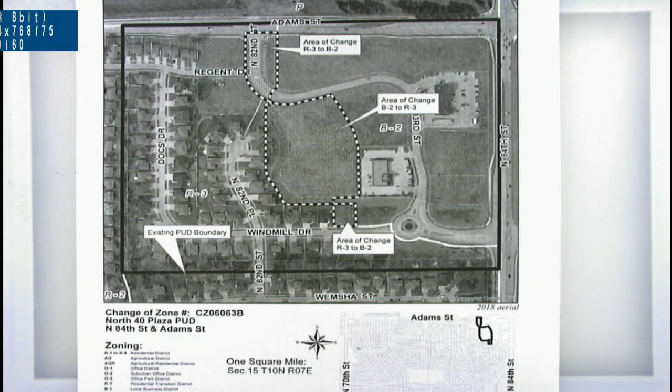Rachel Jones, planning staff. This is a proposed amendment to the North 40 Plaza PUD, which is located at North 84th Street and Adams Street. So here we have Adams Street on the north and 84th Street on the east. This is a proposal to convert several office and commercial lots to residential, and they are showing a total of 28 new single-family attached units.

So the three areas of change: we have this area and this area west of North 82nd Street, which are designated for office uses, currently going to single-family attached residential, and also this area south of Regent Drive, currently zoned B2 PUD, that would also be changed to single-family attached and be located on a new cul-de-sac.

So we have received correspondence from some of the neighbors, in particular the owner at 8224 Windmill Drive, regarding the pedestrian easement location. And this is a long block, so a connection was required from the new proposed cul-de-sac.

And it was originally shown connecting Regent Place with Windmill Drive to the south, as shown here in blue. And so based on the owner's opposition, who lives here, and several other neighbors, the pedestrian easement will be relocated to run east, connecting to North 83rd Street, south of the Jensen Tire. So that change is shown here in orange, so it would come down and then east like this.

And the planning department's position is that this is a reasonable compromise, and this would move it further from her property while still preserving a connection.

This is another exhibit created by the applicant that shows the revised easement location, and it's showing just over 30 feet from her property line to the new sidewalk.

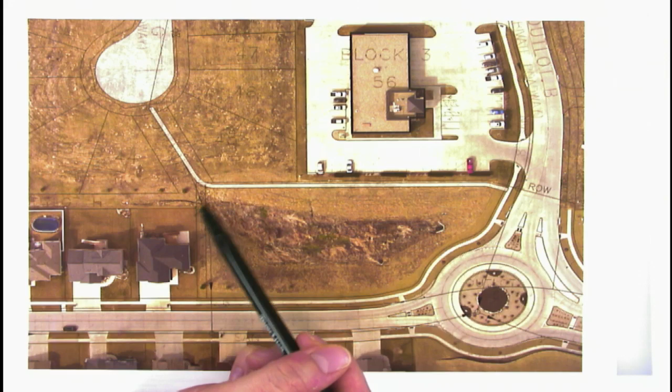There was some discussion about moving it further north on the north side of Jensen Tire, but that would cause the connection to serve less of a purpose for the new cul-de-sac residents. We anticipate there will be some desire to head south and west from the cul-de-sac because there's a school located to the southwest.

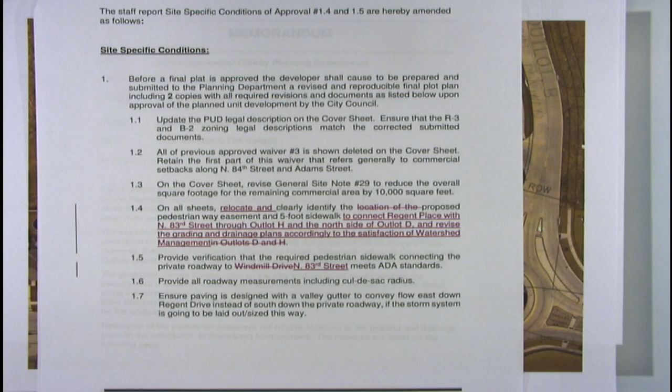So we submitted a memo to the Planning Commission revising the conditions for the change, which I think you all have received. The Watershed Management Division and the applicant both believe that the revised location is feasible based on the grading. So with that, I'll take any questions you have.

Are these amendments that we would need to approve, or have they just been changed with the staff report? They are just being changed in the staff report, is how they were submitted. So they would now be part of the project? That's correct. Thank you. Any other questions for staff? No? Okay, thanks, Rachel.

Thank you. Testimony from the applicant, please.

Good afternoon, Commissioners. My name is Luke Summers. I'm here on behalf of Clark Anderson Partners. We are working with the applicant, Apple's Way.

I've brought an exhibit showing the area where we're proposing these changes. You can see it was originally designed to be commercial, but we've gotten some interest in residential development there that they'd like to take place this spring and summer if we can get everything approved. Originally it was going to be commercial, and it's been set that way and vacant for 10 or 15 years, I believe. So with this interest, we're looking to request a change of zone to change that commercial area to residential.

With that, the city planning department has asked us to clean up the zoning boundary that was originally set with the original PUD, just to show what the defined uses really are going to be. There are a couple areas on the north and south that were originally residential that are going to be reverting to commercial, and some that were residential. One area was part of this commercial lot and a bit of the commercial private drive, and another was part of a detention pond that was originally set to be a lot, but the detention moved around and became part of the pond. So there's no longer going to be a single-family home there.

So we're proposing attached single-family dwellings here to act as a buffer between the existing residential and the commercial area. We had originally proposed the pedestrian crossing here, expecting traffic would want to go south and west, but we are willing to change that and move it to the east if that will make things more agreeable for the neighbors.

So we are agreeable to that change, and like I said, we've got somebody who thinks they're ready to develop it, so we would like to reach some sort of agreement this afternoon on what course we should be taking. Any questions?

Okay, thank you. Any questions for Mr. Summers? No? Okay, thank you. Now we'd be calling testimony in support of this application. Seeing none, let's look at testimony in opposition of this application. Okay, excuse me, thank you.

I've never done this, so take your time. It's okay. I think I agree with the zoning change. We live at 8224. Brittany Banders. Did you get the address, Jerry? Yes. Okay, excellent.

We agree with the zoning changes. What we're in opposition to is where the sidewalk is going to be placed, or where they're proposing it. I know they helped us out by not having it go along the east side of our house, which was huge for us, but I think the problem we still have is it's still within our backyard area. We have young children, and we don't want the traffic or feel like there's people walking within our back area where we spend a lot of time. Where they're proposing it, we still feel is very close to our backyard.

We were also told there was a possibility they could put it between the two businesses, which we think makes a lot more sense. It doesn't hinder any residents' privacy. Our end lot, we thought we picked it because it had more privacy, and now we feel like that's being taken away. So we feel that putting it between the two businesses isn't that much of a difference lengthwise. They're saying it doesn't serve a purpose there, but really it's on the other side of the building.

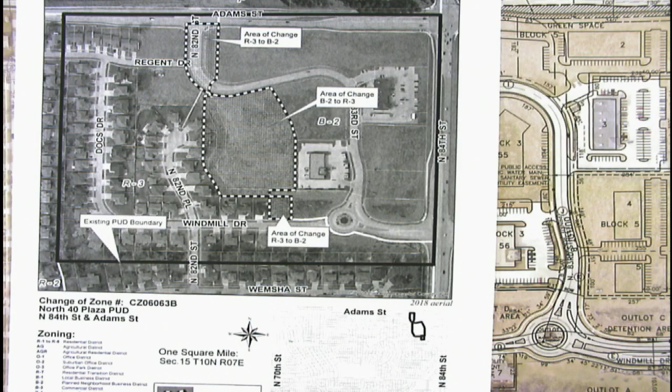I'm good. Okay, Rachel, would you show us on the map where, between the two businesses, the neighbors are proposing? So they're proposing a third alternative that would be located right here. Okay, thank you. And then show that on the other plan, the one where it's developed with the lots, showing it, if you don't mind. Thank you, that'd be great.

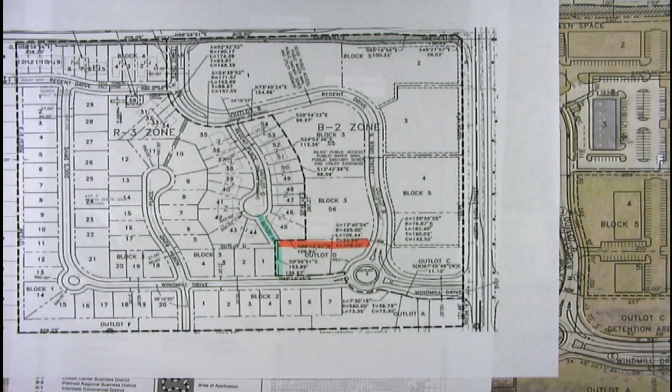So it would be somewhere right around there? Yes. Would it eliminate a lot if that were to be done? A residential lot? It could. That would be something the applicant would have to look at and see.

Okay, any other questions for staff? Okay. Applicant rebuttal, please.

We have taken a look at that, the possibility of putting it between those two businesses. We don't own either of those properties anymore, they're both owned by other entities. There's no existing easement for pedestrian access across there. At one time, before the north one was platted, there was an access easement with the expectation this was going to be commercial and you'd have a driveway or something through there, but that has been vacated and is no longer part of that parcel.

So it would take some property easement acquisition to make that happen, and it also doesn't flow well with our current layout. With the townhomes here, we'd have to bring it somewhere south here, have a jog to the north, and then bring it across somewhere, and it just does not flow well. We'd have to look at whether we can rearrange lots somehow to make it work, and they are very tight as it is. That's why we've requested a couple waivers for dimensions and stuff for it. So it would be very challenging to make that option work.

There will be, if we do this route, some additional grading, maybe a short retaining wall or something to make sure that we can make that work. But it would also be on the opposite side of an existing drainage way. There's a drainage way here in this outlot H that connects this area to the west with this detention area. So it's a fairly significant drainage way across there. That would also help separate this property from that sidewalk.

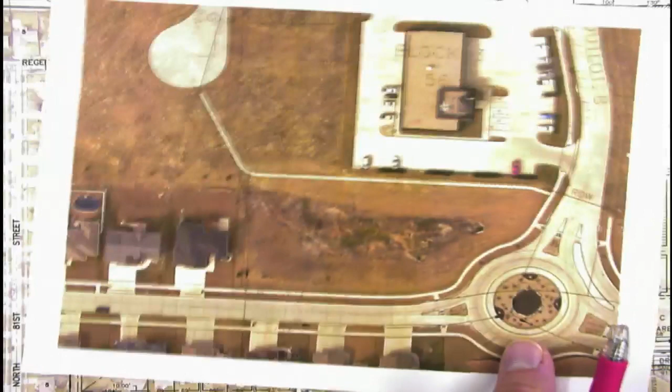And how far would the path go between that property and the property to the south? The closest point here was 30 feet, and I've got another exhibit here. So this property corner right here would be approximately 30 feet from the trail at its closest point.

And can you point out on that map the drainage way you were talking about? Yes, it's right here. There's a drainage way right through here that flows into this pond. Thank you.

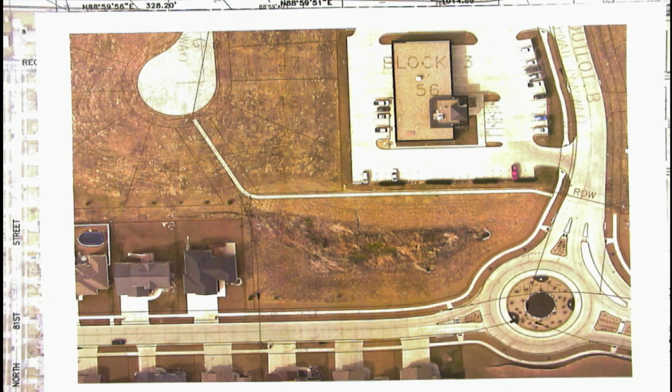Would you be willing to do some landscaping on that corner to separate it for the homeowner? We could certainly talk to the developer about that. With the drainage, I mean, there's already some landscaping, but I could talk with the developer about that.

Any other questions? I have a question. How about, would you be able to entertain putting it between 45 and 46 and then take it down to the sidewalk?

Between 45 and 46, those are meant to be a shared lot line. It'd have to go between 46 and 47. We have not looked at that option. That would lengthen it even more.

One of the reasons we specifically looked at this is because there's already storm sewer and sanitary that are going to be through this outlot, which is not a buildable area. We're going to have a wider area to get that path through. All of these are approximately 10 feet at the narrowest spot, and they're almost right on the setback line. So if we're going to put in a pedestrian way or an easement between any of those buildings, we're going to have to start moving buildings around to make it fit. Whereas here, we've got an outlot that we would be putting it in.

Other questions? Just so to clarify, if that's an outlot, it's not going to be built on. There's a chance that even if you moved the official sidewalk up, people are still going to naturally walk through there because it's not built.

We're hoping to fit probably some daylight lots on there so that it's not the full basement, but I don't think we have quite the grade to make them walkouts. So it is going to be elevated a little bit as well, and that's going to be the overflow channel from the cul-de-sac down, so it's going to be graded a little more gently through there as well.

Okay. Any other questions? Okay, thank you.

I would move we close the public hearing. Second. We've made a motion to close it. Edgerton, sorry. Edgerton? Okay, yep, thank you.

Sorry about that. Okay. We have made a motion to close the public hearing with a second. Let's have a vote on that, please, Jerry.

Albadre? Yes. Campbell? Yes. Edgerton? Yes. Finnegan? Yes. Joy? Yes. Raymond Yost? Yes. Motion carried, 6-0.

I would make a motion to approve this plan, and would request that the developer do some landscaping on the corner to give the homeowners a little separation from the path.

I'll second. Edgerton. Okay, we've had a motion with a second to accept the revisions that we've heard today and then add landscaping. Is that correct? Mm-hmm. Yep.

Okay, hold on. I have a feeling that the landscaping may be a challenge for us to implement, given that the developer is different than the owner. Right, that's why I'm requesting that the developer do it, not as part of the motion, but as a suggestion. Right. Okay, perfect. And with the detention area—

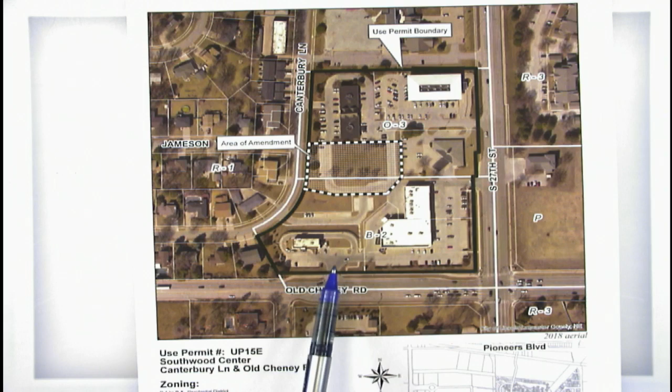Lot 4 is about 1.1 acres. It's mostly in the O3 zoning district. It is the last vacant lot within this use permit. The proposal is basically shifting some square footage from Lot 7, where there is currently a Dunkin' Donuts, to Lot 4. So again, the overall square footage remains the same.

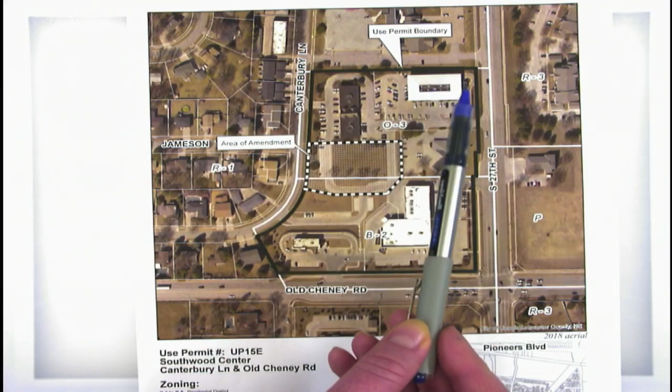Access can be taken into the site off of South 27th Street in a couple places, Old Cheney Road, and also North Jameson and Canterbury Lane. Within the total use permit, there are approximately 350 parking stalls, which exceeds the 297 parking stalls that are required.

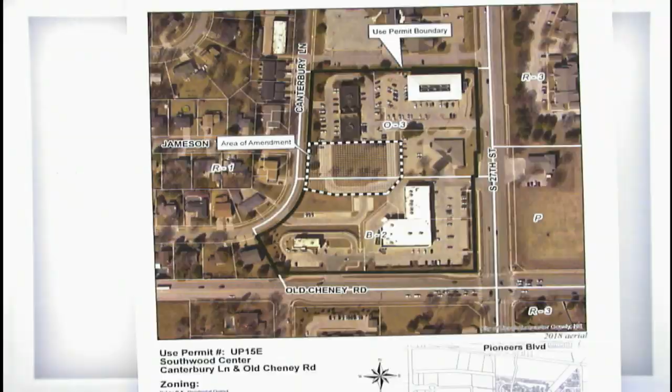Originally, LTU did have some concerns about the number of peak trips being generated by this proposal, and also with some of the stacking with the drop-offs. However, the applicant provided updated numbers on trips and times based on another existing facility the franchise has already built, and they showed compliance with the stacking requirements per our code. After additional discussions, LTU agreed to delete the 2 conditions outlined in your staff memo. Also, there was a typo in the legal description where it said lot 3 and it should say lot 4, but that has been corrected and will be corrected as we move forward with council. With that, I'm happy to take any questions.

Can you explain what a stacking area is and how that works? Sure. In certain uses, when there are cars that may have to drop children off, they have parking where... this is the building, and the cars line up and stack across the building. We have certain requirements for that. It'd be very similar to any bank drive-through or restaurant drive-through.

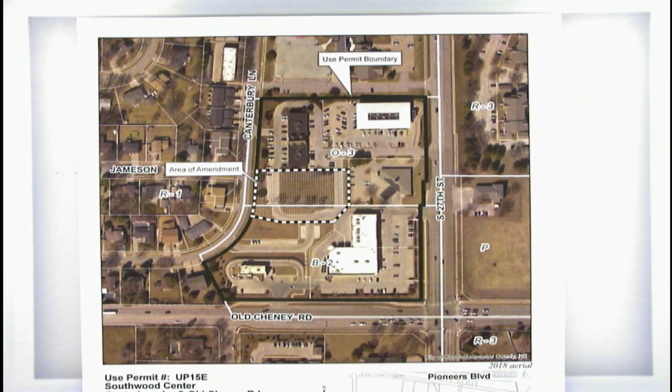That ground slopes to the west. Has there been any indication in your working with them how they're going to handle the drainage coming off the other pad sites? I think that would probably be a question for the applicant. I do know that there is an existing detention facility that was built basically to handle the full build-out of the development. Okay, thank you. Other questions for staff? Okay, thank you very much.

Let me zoom in here on this plan. This shows the layout of the building. The building would be located right here, and there's an L-shaped piece on the east and south sides of the building that would be the playground area.

There is quite a bit of grade associated with the property. It would be a 2-story building. The eastern portion, which would have the play area, would generally be on the higher side of the property, and the lower side would be the floor everybody enters. So most of the people dropping their children off would park on the west side of the building and enter the lower level.

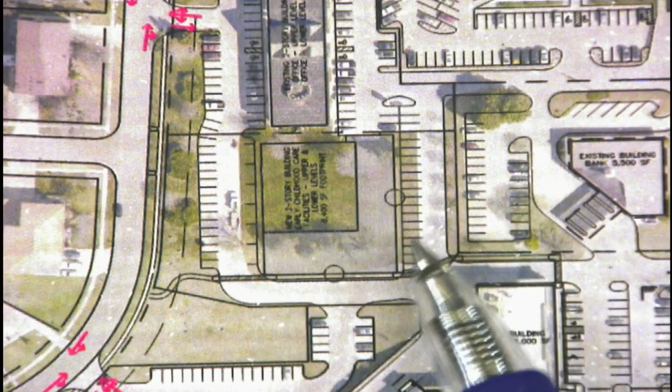I'm not sure if Desi knew this, but there would be parking added, with parking stalls added primarily along the play area on the east side. Then right in front of the building, as Desi had drawn, there's stalls.

Let me say that again. There's kind of a drop-off lane. We designated in this picture just to show how many vehicles you could stack there with different tick marks as it would be with parallel parking. Those markings won't actually be there, so it won't look like parking spots. This will be a drop-off area, and cars will filter through there.

We've presented this to LTU in a better fashion to show how this would operate. We do anticipate that there will be parents parking in the parking lot along the west side and getting into stalls to get their children out and into the building. The cross parking is really good because employees won't have to take up those stalls, and they will be able to park along the east or even the south side of the property where there are additional stalls rarely used by the development currently.

As for drainage, right now probably 90% of the drainage is actually installed already, so the additional parking will connect to it. There's a detention cell directly to the south that takes the additional runoff from the development, has been pre-planned and recently upgraded to meet current city standards and regraded. So the city has actually looked at that very recently.

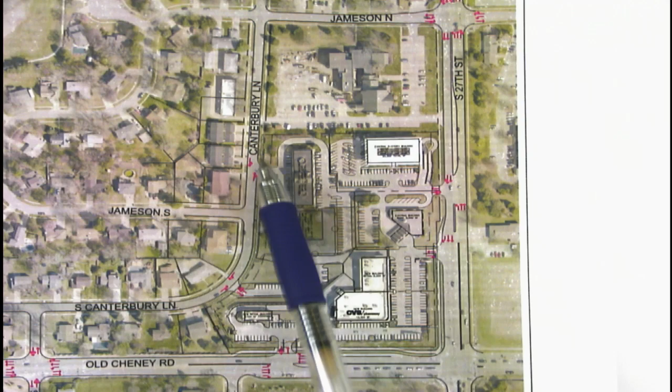I'll point out that there were some questions about accessibility of the site and the locations and traffic. The use permit boundary has 2 full access locations: one is right here, and another across from the Dunkin' Donuts. There is also a right-in, right-out located southeast of this property.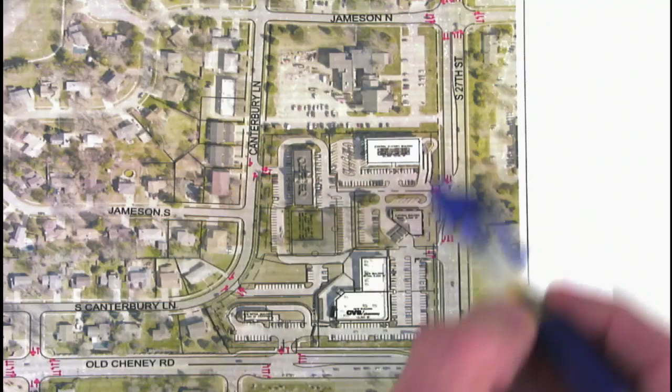There are 2 locations where people may be coming from the neighborhoods to drop their kids off to the site off of Canterbury, and if they don't make their way through the parking lots of the office park, they could go up to Jameson or even back down to Old Cheney and get to 2 other full access locations. Jameson is a signalized intersection, so that would probably be a really good location for people to go.

So with that, I'd be very happy to answer any questions about the application. Any questions for Brad? A comment.

I was in New York and I got into stacking chaos, at my granddaughter's place, so I panic when I hear stacking. They're not Nebraska nice in New York.

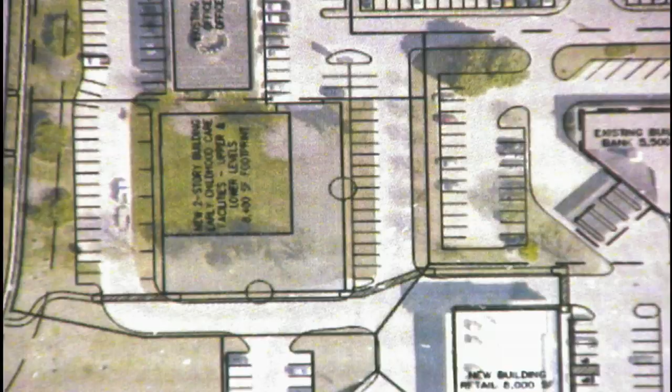How much stacking do you anticipate there? Let's see here. I didn't count the stalls, but I think there's enough room for 5 or 6 vehicles on the west side of the building. We would generally give 20 or 20 plus feet for each vehicle. This day and age, the vehicles are much bigger and they do need a little bit of room.

There was concern when we were talking with LTU. I start thinking about dropping kids off, which I do about every day at elementary school, and you get into that long stacking situation at LPS to drop them off. This is going to be much more spread out than that. It's not like a school with an 8 o'clock opening where you're dropping off hundreds of kids at one time. This will be spread out.

The analysis that they provided, between 6:30 and 9 o'clock for a very similar sized franchise, the maximum number of vehicles they had was between 7:45 and 8 o'clock, which makes sense since a lot of people are going to work at that time and dropping their kids off. That was 20 vehicles over that 15-minute period.

And so with that 20 vehicles, you've got a couple of drop-offs. Those are going to filter out and open up for other ones, and in excess of that, there are parking stalls included as part of the requirement.

Is this the case though, where parents get out of the car and walk the kids in for childcare? Yeah, so it's a longer period of time you're in the stacking line. It's not roll up, stop, and kids getting out—it's much more children getting out of car seats and helping them, assisting, and then getting them in the doors.

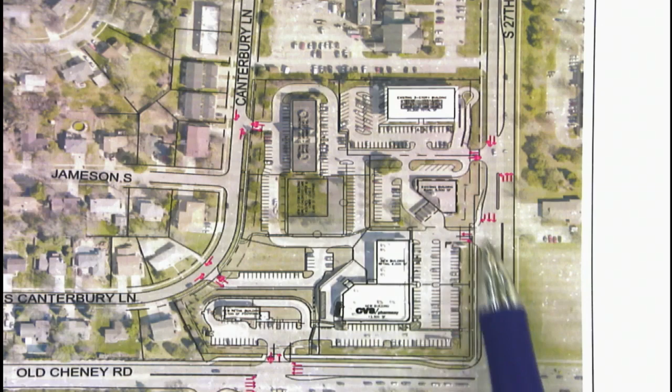And then if you wanted to come from the north to the south on the stacking lanes, you'd have to go up and around that other building? Yeah, you'd go that way and then further north. So if they were coming south, there's a straight shot up the hill and out to Old Cheney if making a right turning movement. Otherwise, they would come up that block or half block and go to the full access where they could make those left turns out.

But if they were going to go around, what is the building to the north of the childcare? It's an office, so it would have uses too. If they wanted to go facing south to drop their children off, they would have to go around the north end of that building to come into the stacking lanes, correct? If I'm understanding you, yes.

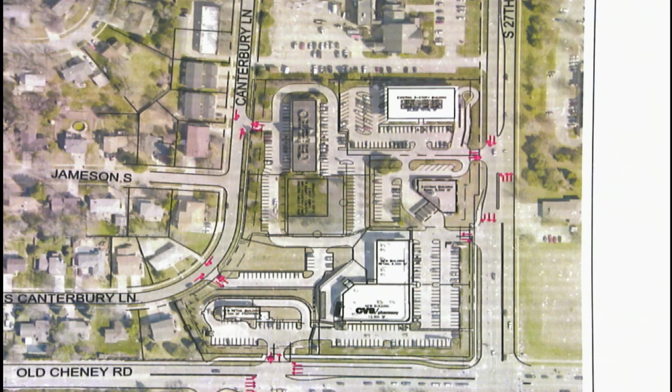Dennis: Brad, the perpendicular parking directly across the drive lane from the new facility, that could also be used for parents to pull in and take the child across the drive lane to the entrance, right? Absolutely, we have the stacking lane which accommodates 5 or 6 cars, but we also have parking spaces that work. The point I'm trying to get at is that it doesn't matter, you don't have to come at this facility from one direction—you can access it both ways and park.

Correct, okay, yep, that is right. Other questions for Brad?

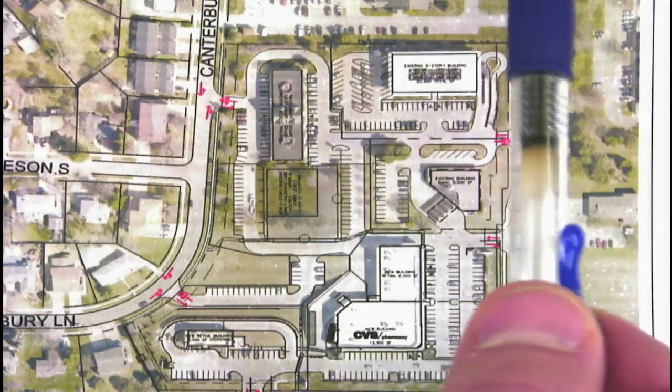Brad, is there a signal at that north entrance? I know there's one up at the street north of there, but is there a signal there? You can see where I'm pointing, just to make sure at this location. There is not. Jameson is the only one, besides Jameson having a signal, 27th and Cheney, and then that is it. Those are the only signalized intersections.

And then, is that a sidewalk to Canterbury Lane that you've shown there? That comes off the corner of the building? Yes, it is. Off the corner, that would be located at that location, that's the right-of-way sidewalk. Okay, thank you. Anyone else?

Another question, yes sir. Is there parking on Canterbury Lane? Do you know if there's parking allowed on that street? The only thing I could say is based off the aerial image, it does look like there's a vehicle or two on there. I don't know that there's parking prohibited. There is? Is there parking allowed?

Would you anticipate that parents may, like a lot of LPS locations, just ditch the whole stacking thing and park to avoid the stacking? I would hope not. It wouldn't be encouraged by any means. I mean, with this particular layout, enough parking is available near and on the property itself, that parents would probably be discouraged from doing that.

In my experience, the further you have to take the child, it's not as easy of a task. Any other questions at this point? Okay, thank you, sir. Thank you.

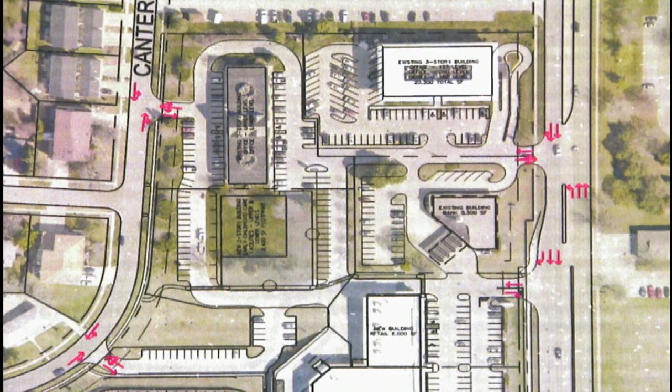Are you talking about the distance between here and here? Yes. I could scale it off. Well, just an approximate. 40 yards. 40 yards, okay. And the entrance to the new building will be on the west, is that correct? East, or west? North is to the top, so yeah, it's on the west.

Any other questions for Desi or Bob? Bob, did you look at, or did traffic recommend, any additional turn lanes or anything like that to address some of that congestion? We did not—that was one of the concerns we had originally, whether that impact in the peak hour meant we should look at those things, and I think they've alleviated that concern.

And what were the numbers again, do you recall? Instead of the 178 from the chart standpoint, what were the actuals based on their other facilities? This breaks it up into 15-minute increments, and you can see it spread out. The applicant is saying, since there are five different access points, not all 20 cars would be coming in on one access point.

Do you know where this other location is? I do not know where the study came from. I believe it's in Nebraska. Oh, I see what you're saying—that's what I was wondering, whether the demographics of the area were similar. Just curious. Do you have a pickup chart also? No, we do not.

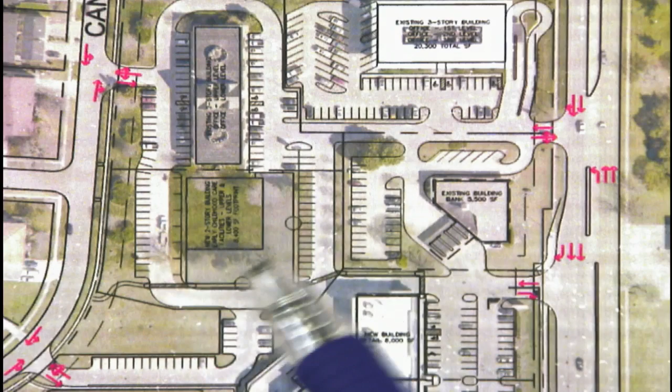And how many parking spots did you put on the west side? It looks around 15 on the east side. And there's probably just as many on the west, or that are currently fronting that property.

As I pointed out, if I were asked by the applicant where a great location would be, it is around this detention cell, off to the south. We installed those as part of the design when we did Dunkin' Donuts, as a requirement, but they're very underutilized in my opinion, and so that would be a great location for employees to park.

And Brad, could you confirm for us that there will not be parent drop-off or pickup at all on the east side of the building? I don't think so, from my understanding. I would assume the daycare has kind of a lockdown situation on entrances. There's not intended to be a main entrance on the east side.

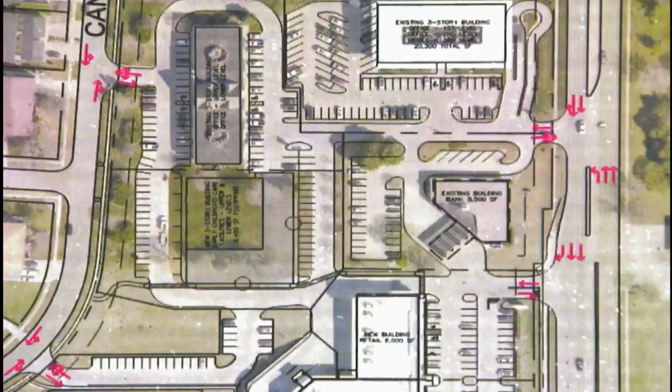Where would the playground area be? Is it fenced? Is it all around, the entire L? Yes, it is all of that space. And that would be fenced, correct? It would be fenced, absolutely.

Does the circles represent something specific? It's just, they look huge in this, the way it printed out, but that's actually a fence. It's supposed to be much, much smaller, but that's what that actually is.

And that facility is in the state, is that correct, Brad? I'm not sure of where the actual facility came from. They have more than one. They are a franchise, and so they do have multiple locations around the country.

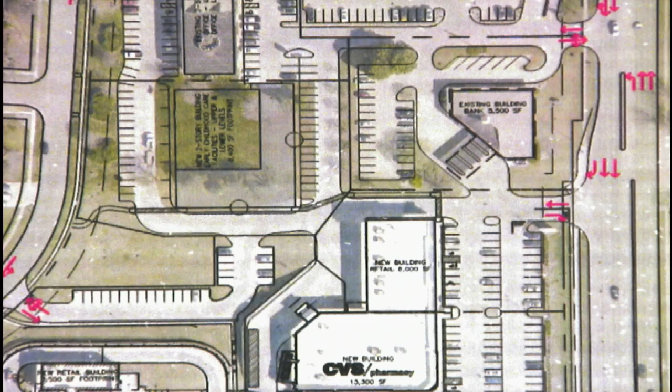And on the outlot around the detention cell, is that 29 stalls there? Is that what you count also? Because we have then the retaining wall on the back side of the existing buildings, Dunkin' Donuts and CVS, et cetera, there. I'm just trying to get a feel for that.

Important for kids. It's important. Okay, anyone else? Okay, thank you, sir.

Thank you. I'll entertain a motion to close the hearing. I move that we close the public hearing.

Second? Joy? Jerry? Okay, Albadre? Yes. Campbell? Yes. Edgerton? Yes. Finnegan? Yes. Joy? Yes. Ryman Yost? Yes. Scheer? Yes. Beckius? Yes. Motion carried, 8-0. I would move that we approve application use permit 15E.

Is there a second? Second, Albadri. Discussion?

My reason is this is a property that has been very difficult to fill in the past. I think child care makes a great deal of sense in there, and I think they've accounted for several different opportunities for entrance and exit. And I think it would be a good fit for that piece of property.

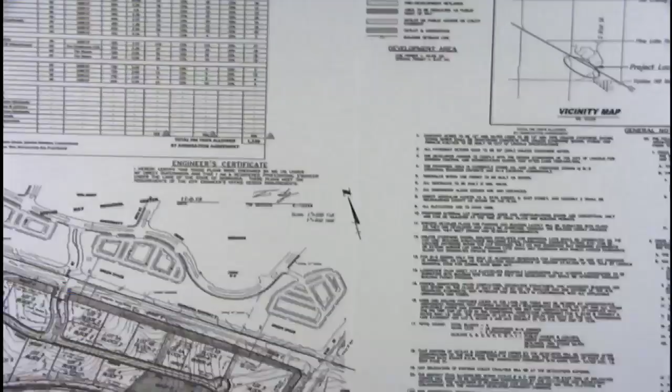So I'm not going to be able to get the whole site plan here, but what I'm going to do is focus in on a portion of it. Is that Exhibit B? Yes, the table itself, I zoomed in, and it's in your packet.

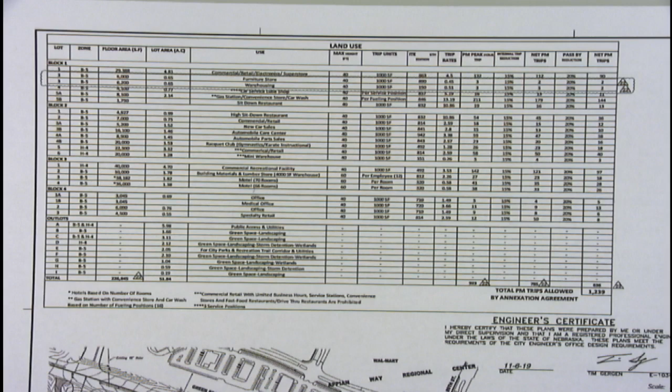And so this is the table that is part of the use permit. In its original form, it probably came about verbatim out of that traffic study. So it's placed on and made a part of the use permit. You read down through the uses that are listed here, and it talks about specific uses and specific amounts of floor area per lot.

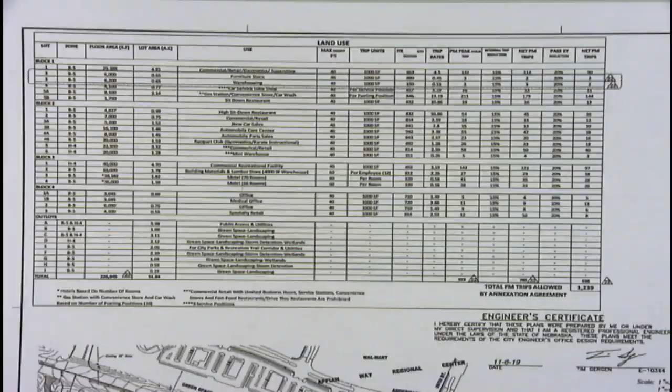Well, it's about 6 months after approval, and Lot 3, a gas station doesn't want to go there, maybe an auto parts store instead. But the changes start coming because the assumptions, well, they were the best guess at the time, but reality is not quite working out that way.

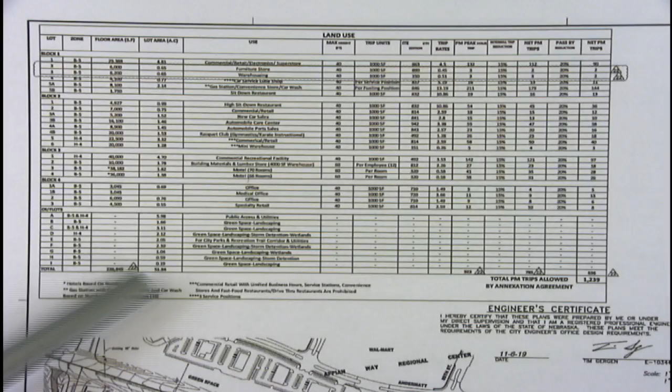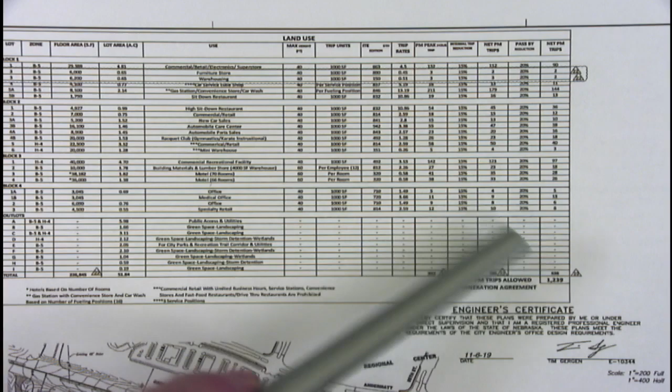And so with the original approval, it was, I think, in everybody's, particularly the city's, interest to keep a pretty close eye on a couple numbers here. This total floor area, because that number does come from the approving resolution for the use permit, so there is a cap there. And then this other number over here in the corner, which is actually two numbers: one is the total number of trips represented, and then the total number allocated for the site.

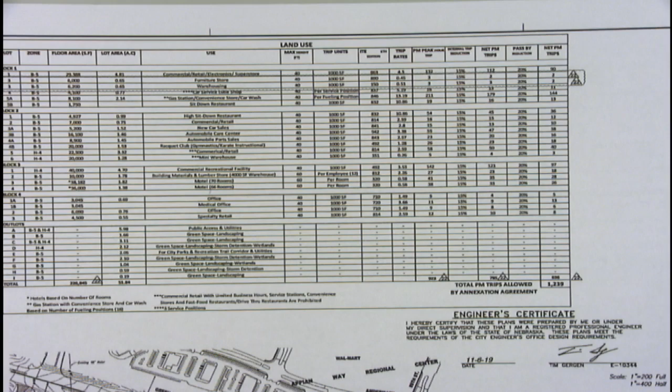And so if you had a magnifying glass and could read those, it will say there's a total of 636 trips shown by the uses here out of 1,239 that are allocated. So they're at about half of the number they potentially could use here. Since 2004, when this use permit was approved, it's been a series of amendments to this table, to take the automotive store out and allow a convenience store or a gas station - 17 of them, in fact, I counted over time.

So a few years ago, we had conversations between the applicant and the city, and because all of the infrastructure has been constructed in the area, water lines, sewer lines, improvements in the roadways, the developer's financial responsibility has been satisfied as a condition of the annexation agreement.

And so we started the conversation and made the suggestion that this thing has really outlived its usefulness. It really doesn't serve a purpose anymore. The developer has satisfied his financial obligations to the city, and in our mind we just don't see a way that this center is going to develop in a way that would blow the lid off any trip or floor area numbers here. It's just not a distinct possibility. And so we've been suggesting for a while that this land use table be deleted entirely.

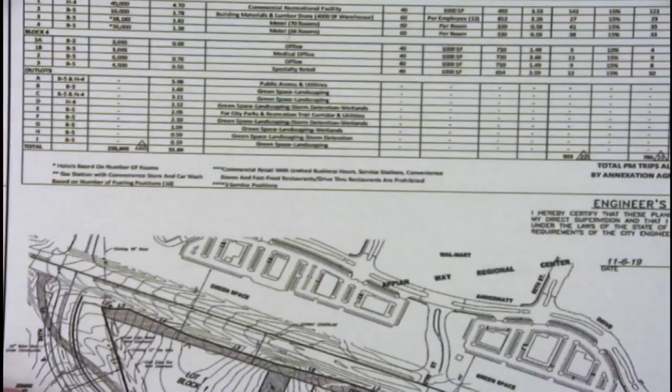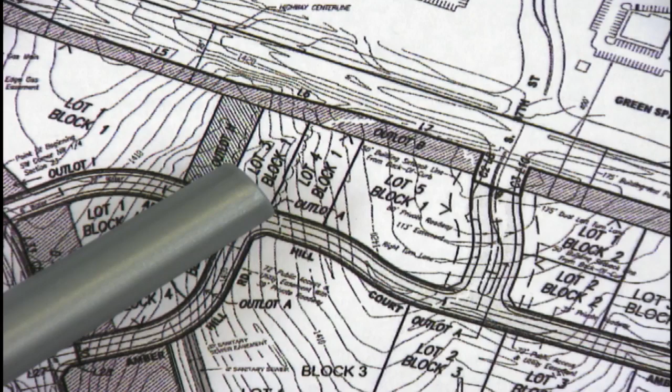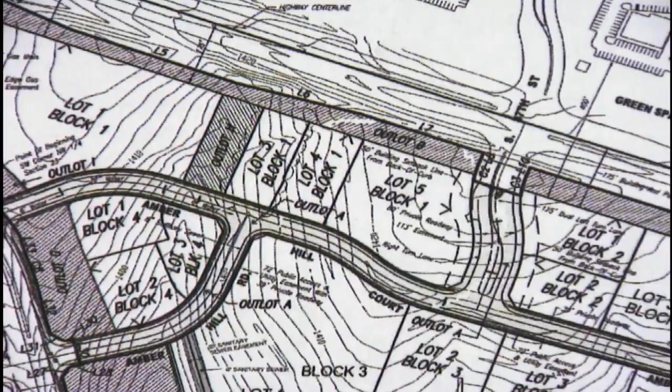One thing I neglected to do, let me show you the lot we're talking about. Let me zoom in on it. This is the entrance at 87th Street. This is a stoplight going into the north side of Walmart, and there's a gas station right here as you come in. We're talking about this lot right here - a 13,000 square foot building. So it's certainly not something of the superstore size. No, we definitely don't believe it falls into that category.

Thank you. Tracy, did you have anything? Okay, any other questions for Brian? Okay, very good. Thank you, sir.

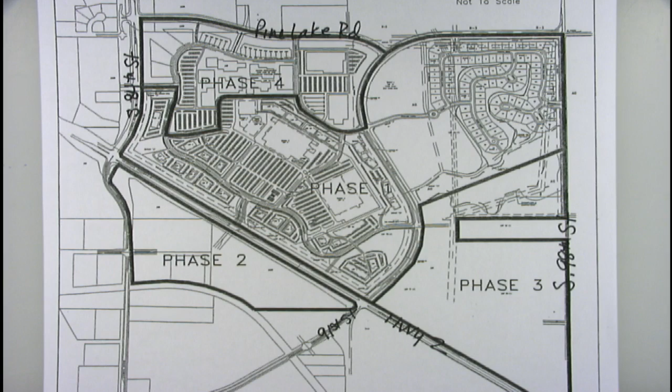Those improvements were ultimately determined based upon a traffic study—multiple traffic studies, actually, because there were iterations through changing land use, changing square footage, etc., until we could reach agreement with the city on how much traffic generation would be supported by these specific street improvements.

I want to talk a little about that traffic study because it relates directly to the use of this land use table. The traffic study was based upon these books, the latest and greatest thing at the time—the sixth trip generation manual put out by the Institute of Transportation Engineers. So this is what the traffic study and trip cap numbers were based upon. Today, when changing the table, we're using use designations and trip rates based upon these same books, so that we're comparing like to like.

Based upon those traffic studies, there was a cap—a certain maximum amount of trips to be generated from this site—that in the annexation agreement were represented as trip caps, north and south. This is a little unique among all the annexation agreements I've done; we're largely worried about square footage, but this is the first one where trips were very important. To implement that, both use permits on the north and south side implemented these supersized land use tables, which include not only the typical land use info but also the trips, following the methodology used in the traffic study.

Half-acre lot. The administrative amendment was submitted for 12,200 square feet, a small retail store compared to a home improvement store. This lot, in the administrative amendment use permit site plan, nothing changed within the site plan. Same lot lines, same access points, same utilities. The only thing that changed on the administrative amendment was the land use table.

So typically when we do these use permit administrative amendments, that's the only thing that changes. Like Brian said, we're at number 17. We've done this many times before. This is one that's changed before.

So we changed Block 1, Lot 3, and divided it into 2 categories, essentially based on hearing what Barry sold at Gotcha Covered, knowing what merchandise sold. It's a furniture store. We labeled it as a furniture store, and the City of Lincoln agreed with it. What he sells is very complementary to what a furniture store sells. You go to Mrs. B's, they sell carpet, they sell appliances.

What he doesn't sell is nails, screws, outdoor playground equipment, or lumber. You don't see items at a hardware store or like a Lowe's or Home Depot. Barry's not selling that, and you couldn't fit that in a half-acre lot. It's a smaller lot, geared for certain items. That is what drove us to the furniture store designation.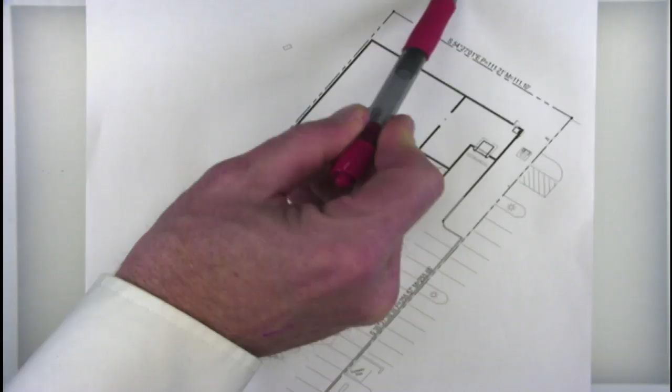The entire north part is all warehouse. Here's his loading dock, merchandise is put in through here, then office area, and here's the sales floor area. So almost over half the building is dedicated to a warehouse, and the other half is dedicated to the furniture store, what he retails. That's why we broke out the land use table into 2 separate categories.

I'd be happy to answer any other questions you have on the administrative amendment. Why don't we get all 3 of you up here for questions? Okay, questions?

To clarify, you're closer to a Davidson's furniture store than you are a Menards or a Mrs. B rather than a Menards? That would be correct. And you clarified no nails, no hammers, none of that stuff? Correct, we don't sell tools, we don't sell nails.

Dick, can you explain why you appealed the amendment approval by the planning director? I didn't, no. We're the applicant for the amendment. Okay, so not the appellant. We will hear during testimony in opposition from the individual that appealed.

So you're saying though that it should stay as furniture store warehousing? Yes. We're saying what the planning director approved was appropriate.

There were 3 waivers requested. 2 of them pertain to setbacks for landscaping, for parking and drives in the front yard setbacks. There was a motion to amend that was submitted, and then a second motion to amend that was submitted this week, Monday, by the applicant's attorney, Tom Houston, which staff is in agreement with. This motion pertains to 2 conditions of approval, the first of which, 1.8, relates to the South Street front yard setback, where the proposed language, which we agree with, is that the front yard setback can be reduced from 25 feet to 15 feet to accommodate additional parking, conditioned upon the applicant installing a double row of landscaping.

So again, that would be along South Street. Kind of to the west, there's Cornhusker Bank at the corner here. It would be to the west of Cornhusker on the south side of South Street. And then the second condition, 1.9, pertains to Glade Street, basically from the southeast corner or near the southeast corner of the new building addition east to South 56th.

The proposal there that staff agrees with is to permit the Madonna drive and drive aisle within the 6-foot area of the property line, except that the 25-foot front yard setback would still be respected for the east 200 feet toward South 56th Street. This would allow for vehicle access around the corner of their building, including emergency vehicle access. I can answer any questions you have at this time.

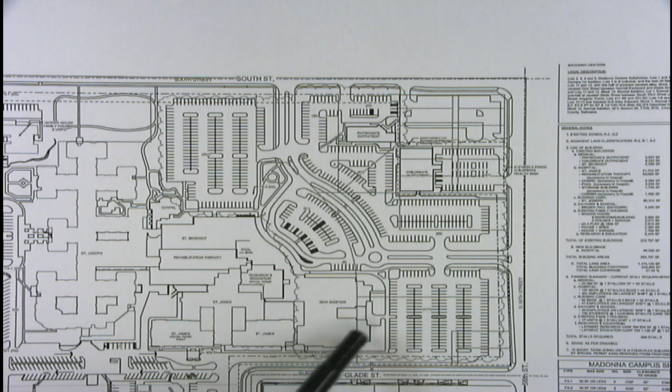George, show me where the new entrance will be. So there'll be, I'm on 56th Street. The new building entrance. Oh, the building will be here on the southeast side of their existing facilities. No, but in the proposal, it mentions that they want to move or redo their entrance. Yeah, is it going to be with the new building then, clear south? No, the applicant can clarify, but I believe they're talking about the entrance here at South 56th Street. I read it to read their main entrance to the building, which is further north by that circle. Oh yes, I apologize. They have a facilities entrance, and the applicant can clarify, but on the east part of their new building, I believe.

And it appears that the north entrance is now closed by this change. The north entrance? The northeast entrance. The north entrance is still there. I would defer to the applicant on that. I'm not quite sure about that. Other questions for staff at this time? Okay, thanks George. Thank you.

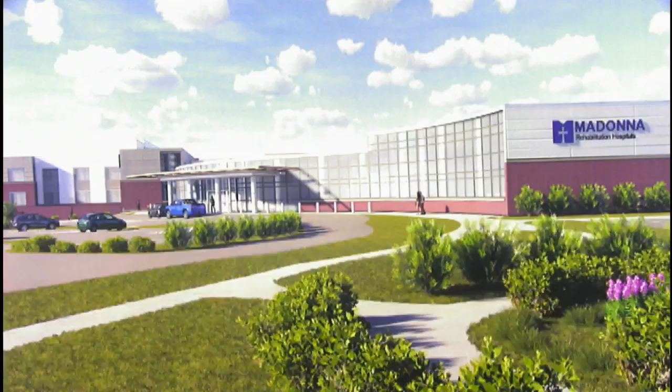Yes, Mr. Chair, members of the commission, my name is Tom Houston. My address is 233 South 13th Street, Suite 1900 here in Lincoln, on behalf of Madonna Rehabilitation Hospital. With me today is Mike Monroe, General Counsel of Madonna, Daniel Grice, Vice President of Facilities, Nate Buss, Project Engineer, and Darren Horst from Davis Design, Project Architect.

This is a good thing. This will be easier than some of your other items on the agenda because this is a major expansion for Madonna and its renowned facility in the city of Lincoln. George is correct, this would add a 48,000 square foot addition to the building. You'll see the architectural rendering, and what you see is the new portion of the facility. This is probably a little more up to date.

Site plan. The changes to the site plan that we're making as part of the special permit are threefold. The addition of the building, which includes this new entryway, this portion of the building, along with the new tower, the new residential patient care facility, because this expansion is all about patient care. That's really the primary purpose of it.

As George mentioned, it is not anticipated that the bed capacity of the facility is being expanded. It's really being moved elsewhere within the new addition to provide and deliver patient care as best as possible. So the primary focus is the expansion of the building and then creating better traffic flow and circulation within the parking lot.

Because it is a large parking lot, and also having access on the adjacent arterial streets. The building itself, in addition to the entryway, will add 3 stories for the patient care. It will add the southeast corner of the campus that has an existing house that will be consumed and added to the site plan itself.

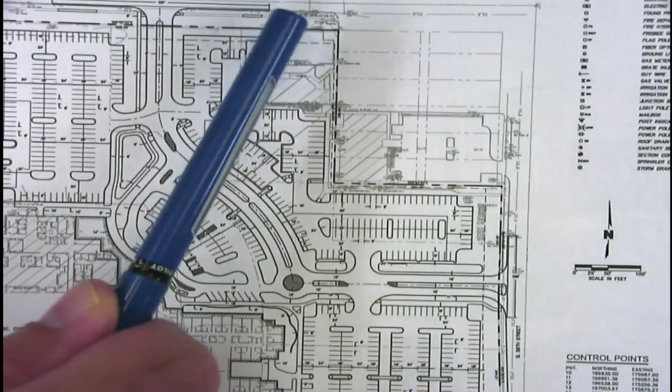The circulation along the major arterial streets, the current existing drive is approximately here. It will be relocated along with the physician's building, to one central access point off South Street. And then likewise, the access onto 56th Street will be moved further south and restricted to right in, right out, because that is a very busy street and any left-turning maneuvers is virtually impossible at peak times at that location.

The other thing the site plan updates is the patient parking lot itself. The parking required under the zoning ordinance is 599 stalls. This parking lot right now, as configured, contains 965 stalls. That's 160% of the capacity required by the zoning ordinance, but that's based upon the experience and needs of the patients and their families and the medical care community and staff that work at Madonna.

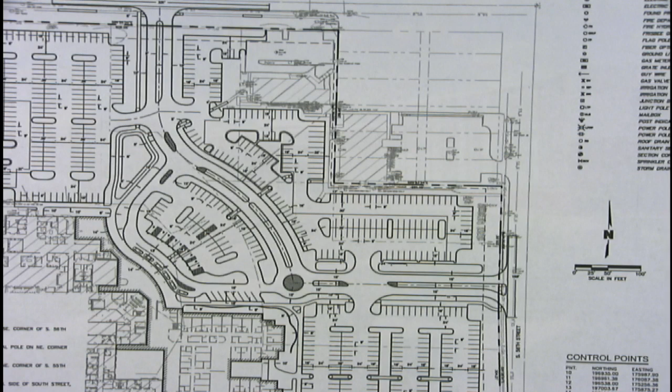I handed out to you the motion to amend because the real issue, and we were scheduled to be in front of you 2 weeks ago, and we took the time to sit down with the planning department to talk about the waivers, because that was the issue we had. We were trying to preserve parking and make sure we had appropriate internal circulation. So we worked out a compromise embodied in the motion to amend that addresses both 1.8 and 1.9 as site-specific conditions of approval.

1.8 is pretty simple. We're reducing the front yard from 25 down to 15 feet to retain 22 parking stalls at that location, which is important. And the waiver pertaining to 1.9 is really to allow the deliveries and back-of-house activities, which occur on the south face of this new building, so truck circulation will be able to go through the parking lot, and we needed to do that.

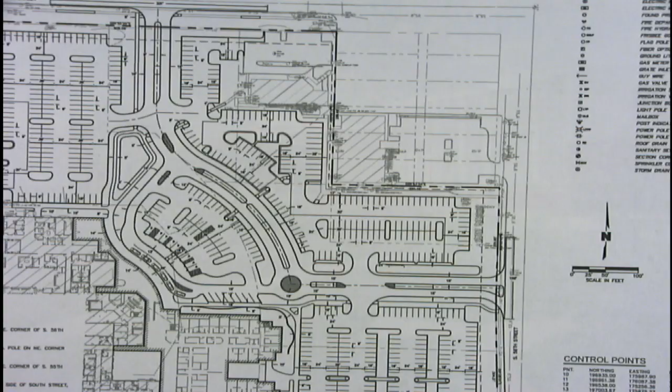Can you zoom out a little bit and show us that again? I apologize, we're not quite seeing what you're pointing at.

The language in the motion to amend would permit this drive within the front yard setback, a front yard setback for Glade Street. There are single-family homes, maybe 6, on the south side of Glade Street. One of the things we're doing, if you're interested, is retaining all of this screening, so we're keeping the screening for the drive, so it will not be an imposition or an aesthetic issue for the neighbors.

But to address emergency vehicle access to the east side of the building and also truck traffic that will be making deliveries to the back of the house of the new facility, trucks will be able to make the maneuvers through the parking lot to get out back onto 56th Street.

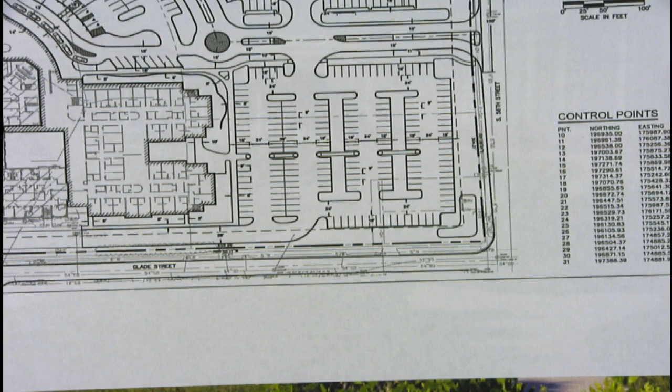And that's what that waiver does, is 1.9 allows us to build the drive and the drive aisle within that front yard requirement, except for the easternmost 200 feet. We're reserving the front yard there and providing the protection to the single-family homes on the south.

Madonna owns a few of them, but there are other owners there that we're trying to observe and protect also. So that's really the motion to amend. I'm glad that we sat down with the planning department, worked out those small differences that we had. This is a good thing for the city of Lincoln.

The planned schedule is that construction would commence hopefully in April of this year, and it's probably about a 30 to 36 month construction process, so it's opening in 2023 is the plan. But this is all about the patient delivery and patient care for Madonna. So with that, I'd be happy to answer any questions, and I have the full complement of the team here if you have ones that I cannot.

Questions? I have a quick question on that, the south side where your driveway is in the right-of-way. Will that retaining wall remain there? I believe so, yes. And so the neighbors are used to having that retaining wall there? Yes. Okay, thank you.

We're able to retain those large yew bushes, and so we're not affecting the grade there, so the retaining wall. Yeah, everything correct. Okay, thank you.

Commissioner Finnegan, did you have a question? Yeah, Tom, you mentioned that there's not going to be an expansion of patients and rooms. Where are you moving them? I mean, what are you going to do with the extra space? It's going to really be consumed by other activities within the use, staff and other offices. Because a lot of them are double occupancy rooms, and in today's healthcare world, there's a demand for much more single occupancy rooms. Sure. And that's really why the new addition's being brought forward at this time.

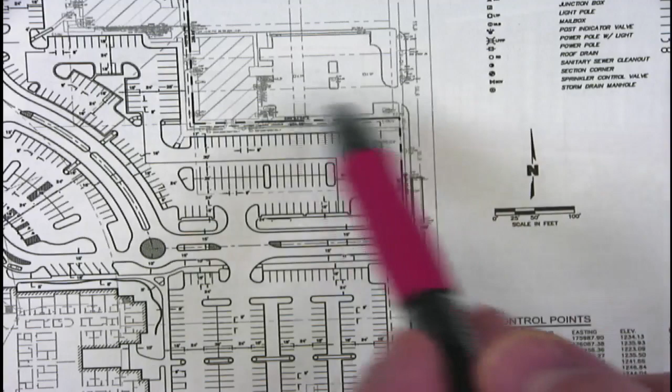That grade change there's actually a pretty significant grade change. But there is a door that accesses onto the south of that building that a lot of staff use, and some staff is utilized in the back of the house as well. But yes, there is enough. We did actually look at that. I think even Madonna brought that up, and there would be a significant amount of work. We're also trying to preserve some of the work that they've done here already, in the past. So yes, there'd be a significant amount of grade change and work to do to make that connection.

Thanks. Yep. Dick? Nate, on behalf of the planning commissioners, happy birthday. Hey. So glad I can spend it with you guys today. Anyone else? I wish we had known. Okay. Thank you very much. Thank you. Appreciate it.

At this time, we will take any testimony in support. I see none. We'll take any testimony in opposition. I see none. Staff questions? Anyone? George, I think you're good. Tom, anything else you'd like to add? No, thank you. Okay, very good.

I move that we close the public hearing. Second, Joy. Jerry? Okay. Campbell? Yes. Edgerton? Yes. Finnegan? Yes. Joy? Yes. Ryman Yost? Yes. Shear? Yes. Beckius? Yes. Motion carried 8-0.

I would move that we approve special permit 450R, as amended. With the amendments. Is there a second to that motion?